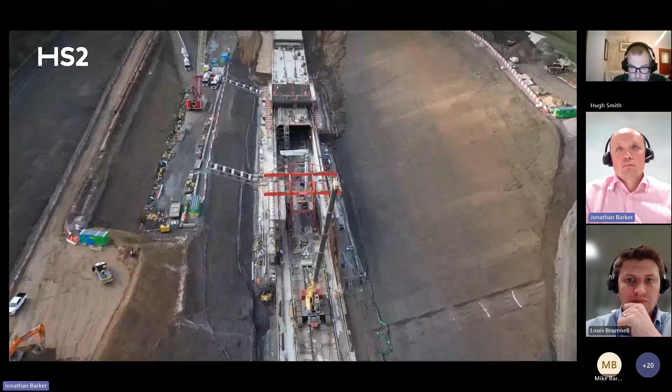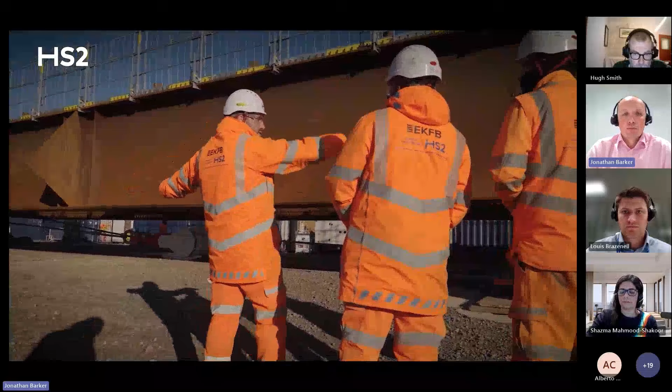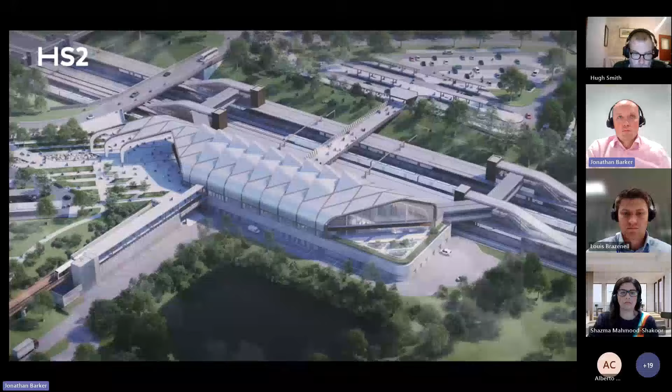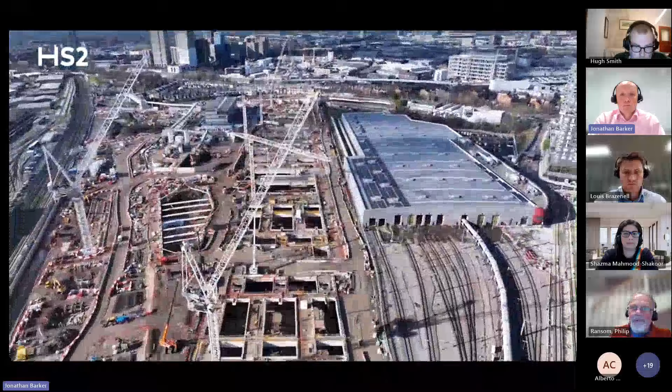Hi, my name's Hugh Smith, Stations Director at HS2, and I'm thrilled to bring you the latest update on the delivery of HS2, Britain's new high-speed railway. HS2 lays the foundations for a 21st and 22nd century railway network, providing more tracks, more trains, more seats, more connections, and faster journeys to improve performance and reliability across the wider railway network. The HS2 scheme will transform the way we move between our major cities, with zero carbon journeys between Birmingham and London, and services then continuing onwards to Manchester, the North West and Scotland on the existing railway network. HS2 is at peak construction right now, employing over 31,000 people day in and day out, bringing together the best of British design and British engineering. Investment in our railways means two things: better journeys and economic growth. Firms from every nation and region of Britain are already helping to build HS2 today, with over 3,000 businesses having already won contracts. The delivery of HS2 is opening up multi-billion-pound development projects in areas surrounding our new stations in both London and the West Midlands. The investment HS2 has attracted to the West Midlands is projected to add an additional £10 billion to the local economy over the next 10 years, creating 41,000 additional homes and 30,000 new jobs. Regeneration in West London, meanwhile, at Old Oak Common, is set to provide 25,000 new homes and 60,000 jobs. As the catalyst for urban regeneration, improved local transport connections, increased housing provision, and of course new jobs, HS2 benefits local people, local businesses and the wider economy. Thank you for joining us on this journey, and stay tuned for more updates as we continue to deliver HS2.

Just a quick recap there of where we are and what we're doing at the moment. A couple of bits the video doesn't pick up I thought worth sharing: it's 140 miles of track that we're going to be delivering as part of phase 1 of HS2. We've got 4 new stations being built at London Euston, Old Oak Common, Interchange in Birmingham, Curzon Street, 2 new depots, and 32 miles of tunnel along the route.

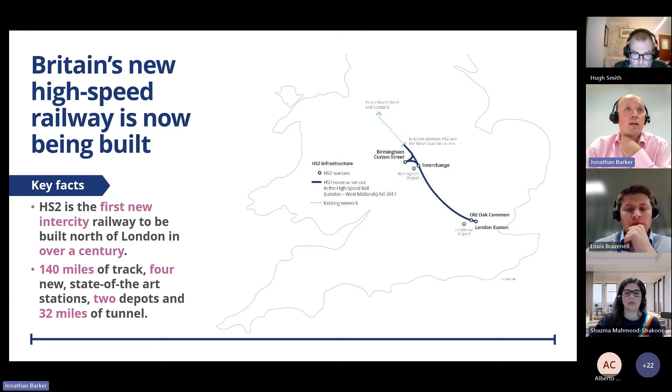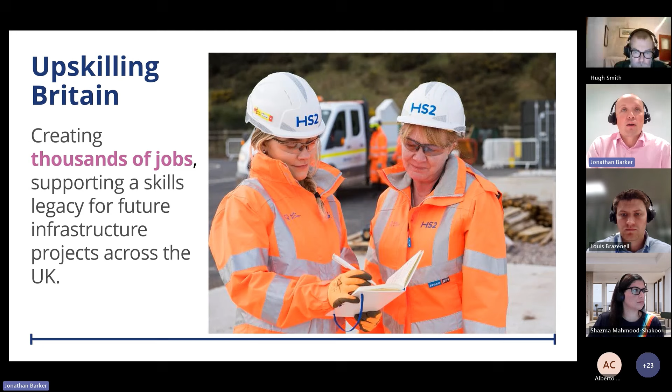Two particular things that video doesn't pick up that I think sometimes get missed by the media in terms of what we're doing at HS2. For me, that's upskilling the workforce in the UK. Hugh mentioned that we've got over 31,000 people now working on HS2 across the line of route. That is a massive workforce, and we don't necessarily have that full skill and capability in the UK, so we are upskilling people to take jobs within the industry. But for me, I think the big win is we've got over 1,500 apprentices now working on HS2, and for me they're the future of our industry of construction. The fact that we're giving them that opportunity to learn on a project such as this I think is great for them, and the fact that we're bringing those people on board I think is going to be great for the UK.

And then, whilst we're the biggest infrastructure project in the UK at the moment, we are actually the biggest green project as well. As part of what we're doing, we're creating 33 square kilometres more of new habitat across the route - that's a 30% increase. And so far we've planted 900,000 trees and already created around 120 new habitats along the route. We all know the railway corridor is a haven for wildlife, and we're trying to make the best of that as we can along the route.

But to delve into a bit more detail, Old Oak Common - I'm a project manager at Old Oak Common. I'm responsible for what we call the conventional station and the shared accommodation building. In layman's terms, I often say, as soon as you walk in the front door and you turn right, everything on the right is sort of what I'm responsible for, which will become clear as we go through the next slides. I've been there for 6+ years now, and enjoying my time at Old Oak Common working on this.

So what was there when I joined 6 years ago? It was still a Great Western Railway depot, housing a number of the diesel fleet that the Great Western Main Line Railway still ran at that time. There's also a Heathrow Express depot and sidings that were still there at the time. So that was 6 years ago when I started.

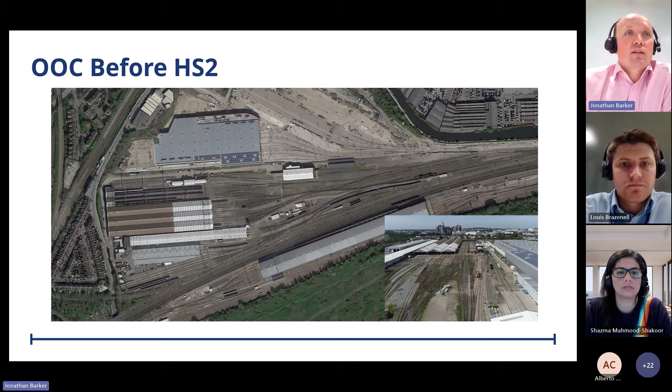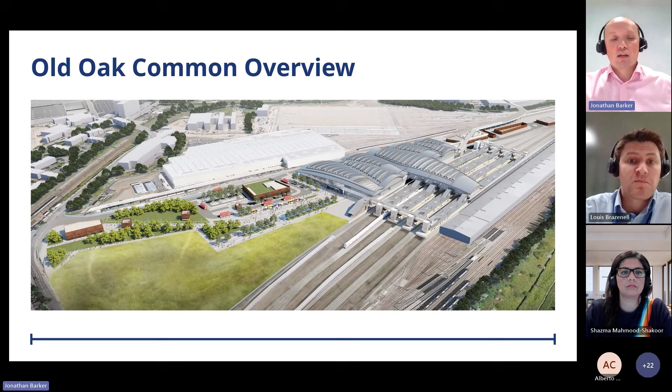And then when we finish this project in the future, what we will have is the biggest single station build in the UK, and the most and best connected railway station in the UK. But a bit more about the detail in this video.

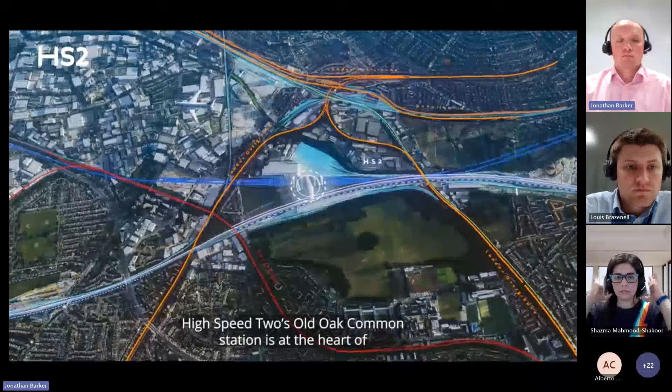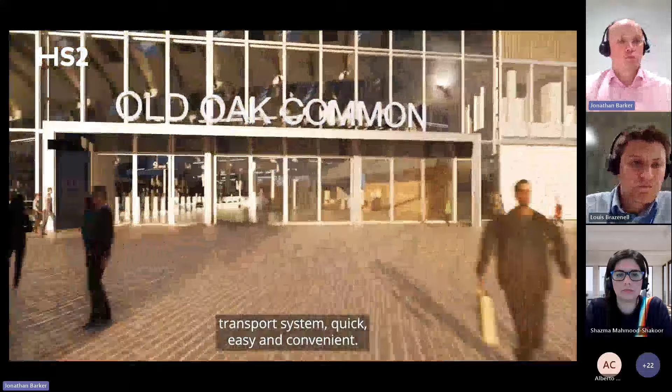In West London, a new super hub of connectivity is taking shape. High Speed 2's Old Oak Common Station is at the heart of the UK's largest regeneration project. This once industrial area is being transformed into a thriving, super connected neighbourhood, and an exciting development that will build a legacy for the local community to be enjoyed for generations to come. With its modern design, Old Oak Common offers seamless travel, making journeys in, out and around London's transport system quick, easy and convenient. A hive of activity, it will connect over 250,000 people every single day.

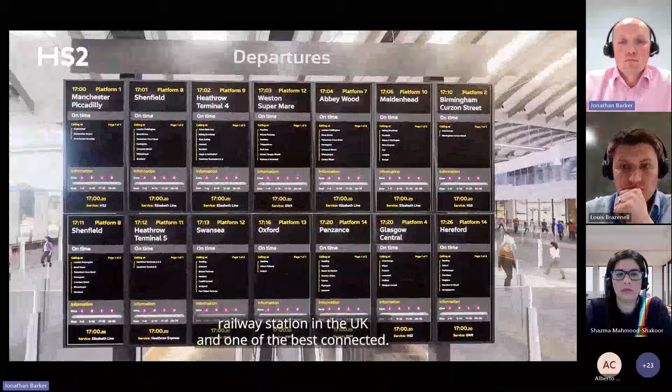14 platforms will make it the largest newly built railway station in the UK and one of the best connected. London's West End is around 10 minutes away, and Liverpool Street Station is just under 20 on the Elizabeth line. Heathrow Airport is only 10 minutes away on the Heathrow Express. And beyond London, it will serve as a gateway to Wales and the South West through the Great Western Main Line services.

At the heart of the station will be our high-speed trains, travelling at speeds up to 225 miles per hour. They'll transform journeys to and from the capital, with increased capacity, faster services and fewer delays. Old Oak Common Station will connect West London with the West Midlands and beyond.

So that's Old Oak Common in a bit of a nutshell. But if we dig a little bit deeper - and apologies, there was no pun intended in that.

We've got our 850 metre long box. If you take a slice through the station longitudinally, to put that in context, a London Underground train is circa 110 metres long. The new Elizabeth line trains are circa 200 metres long, and the trains we're going to be putting on High Speed 2 are 400 metres long. So we've got incredibly long trains that we're going to be running on the railway.

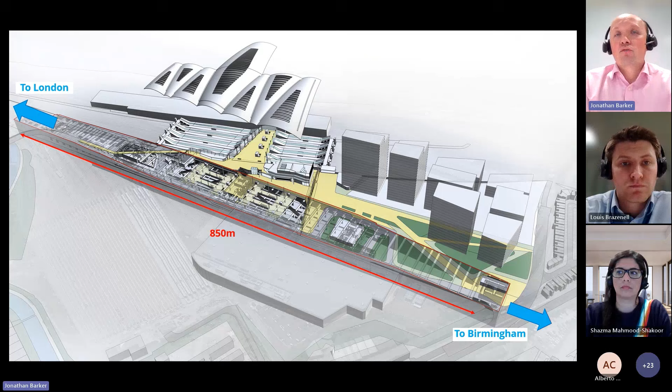So within our 850 metre long box, we've got the 400 metre platforms that sit in the middle of the box, and then at either end we've got points and crossings, etc., that allow the two-track railway running in and out of the box to get the trains to the 6 underground platforms we've got for the high-speed railway. The box is circa 15 metres deep and sits below Old Oak Common, taking the trains from the tunnels from Euston, and then running them up towards Ruislip, and up towards the viaducts we're building in that direction, and obviously up through to Birmingham after that.

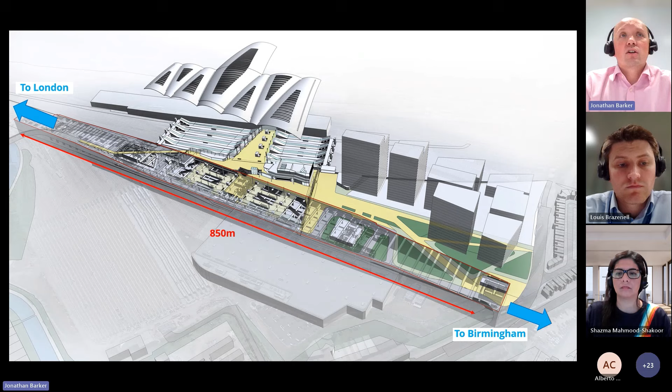If we take a slice through the station in the other direction, this gives a better idea of what the station would be. On the left, we've got the High Speed 2 station with the 6 platforms below ground, and that part of the station, as well as the shared accommodation building which sits in the middle, will be operated and maintained by High Speed 2. The shared accommodation building works for both HS2 and NR. All our back of house facilities are there - switch rooms, pump rooms, welfare, the station's operations room, etc., will all be in that shared accommodation building section.

And then on the right, although HS2 are building it and paying for it, NR will maintain and be responsible for the conventional part of the station, which has 8 platforms being built on that side. And then over the top, we've got a big arch structure - that's one of the key features of the station. A lot of us have travelled around the UK and particularly around London, and you've got a lot of often different operators going into a station, and sometimes they're not always the clearest for the customer of where they should be going.

What our aim at Old Oak Common is that the customer experience will be seamless, no matter which part of the networks you're going on, whether that be High Speed 2, Great Western Main Line, Heathrow Express, or the Elizabeth line - your customer experience will be exactly the same. So everything should operate seamlessly with the signage, the lighting, the direction, and the operation will have a single operational room at Old Oak Common that will run the whole station.

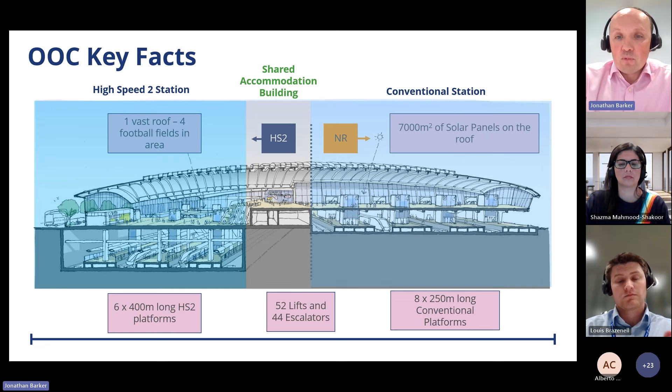But given the size of it, we have managed to achieve the BREEAM outstanding level at RIBA 4, which is the end of detailed design, and that's been driven by adopting innovations and low carbon options in its build, and also targeting net zero carbon for our operations phase.

If you take a walk inside the station, you'll see the openness of the station. We're trying to create a good atmosphere, a good offering to the customer. We're creating a net zero travel option here, and we want to attract the customers to it. We don't want their experience to be something they don't want to do. There's no point putting this provision in place if we can't get the customers to come, so we want to create an offering that's attractive to the customer.

Within this large space we have now, this large atrium layout allows for natural ventilation, and with use of sensors and the natural light coming through, we're able to reduce the carbon impact of the station running in day-to-day use. We've also got a combination of solar panels on the roof and air source heat pumps that again provide that additional push towards creating a net zero station.

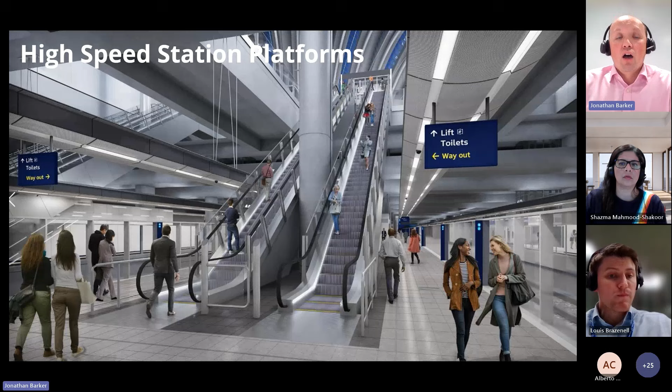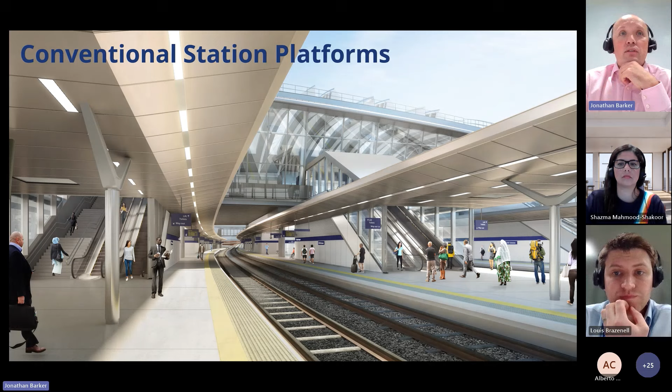If you look from a different angle, if some of you think of Clapham, I'm sure many of you have seen Clapham Junction Station and the amount of platforms we have there and how congested those overbridges can be, we are the opposite here at Old Oak Common. We're trying to make it spacious, allowing for the capacity of passengers we're going to have, not only on day one opening, but also in 100 years' time. So we've created a spacious overbridge that allows that free flow of passengers, and again creates a comfortable journey through for the passengers.

When I first started at Old Oak Common, I wasn't on the station, I was on the bridges, and I used to get disheartened quite a bit because we'd see all these great pictures of Old Oak Common Station, and I could show my friends this is what I'm working on, and which bit are you on? Oh, I'm on the bridges just outside the bit of the photo you can't see, but they are really important, honest. Well, in reality, they are really important.

If you come out of the station and turn left, there's a road that goes down to the bridges, which takes the Great Western Main Line. Currently, like a lot of bridges around, it's pigeon infested, not a great place to walk through, and it can only take single decker buses.

We are creating at Old Oak Common one of the biggest interchanges in the UK, so we need more than single decker buses. One of the things we're having to do is lower the road under the bridges. Also, because we're going from a 4-track railway to 8 platforms, that needs slightly more width to the railway tray, so we're having to widen these bridges along Common Lane to allow for that additional track space. Those are the works happening on the bridges.

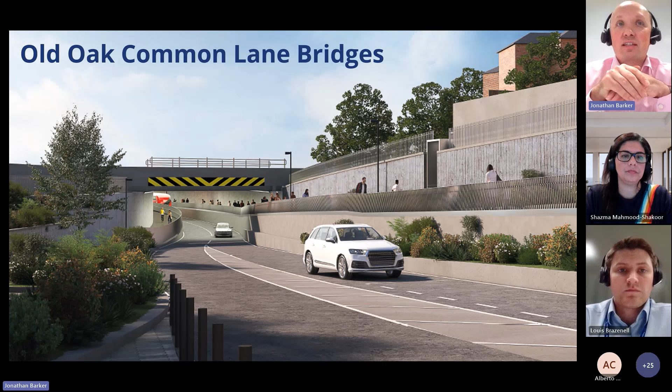As luck would have it, this road seems to be the West London super highway corridor for pretty much every utility that exists in London, so it's not an easy job to move the utilities out of the road to allow the lowering. Whilst it might not be in all the pretty pictures around Old Oak Common, the critical path for Old Oak Common goes through our utilities diversions in this road, and it's actually one of the top critical, or subcritical, paths for HS2 opening. So whilst it's not glamorous, it's probably one of the most important parts of the HS2 project at the moment.

From the other side, when I talk about the pigeons, we're trying to create an environment that invites the customer into the station as part of this bridge renewal. So much so that if you want a nice romantic walk, according to the architects, we've got a couple there having a romantic walk on a summer's day. That's the sort of change we're looking at, tongue in cheek, but it's creating a nice environment for the customer again, and more importantly, a safe environment for customers to travel through the area.

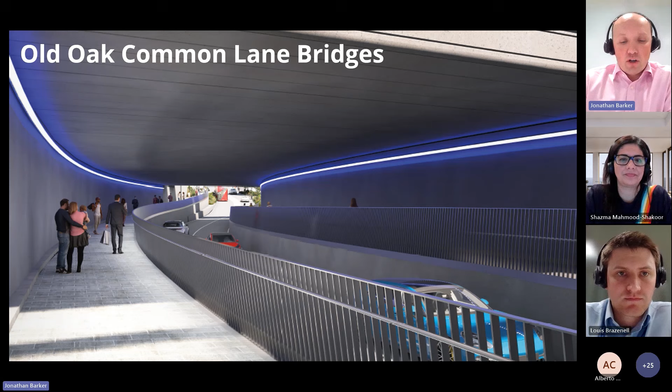So that's a little bit about the design of the station and some of the key features. The only thing I haven't mentioned is the public realm outside, which, as covered in the video, is 3 times the size of Trafalgar Square. It's a good offering for the local community, as well as the travelling public. As you probably know from the press, we will be the temporary terminus for HS2 phase 1 until we get Euston on board.

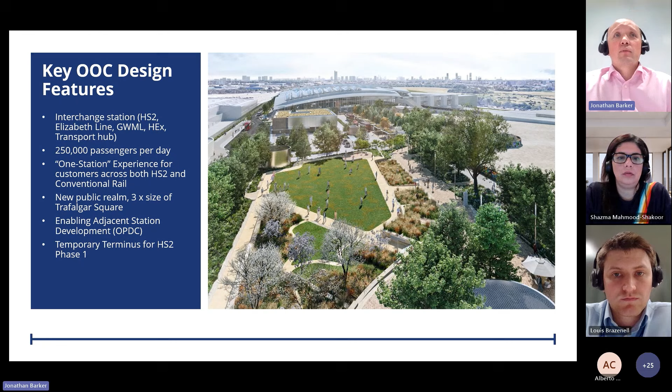So now you know what we're building, how are we building it? This video will show you, hopefully.

At Old Oak Common in West London, construction has started on what will be the biggest newly built railway station in the UK. The construction will be a feat of engineering carried out in 3 main phases. In the first phase, the underground part of the station will be built, what we call the box. This is where 6 high-speed platforms will be located, serving the Midlands and the North.

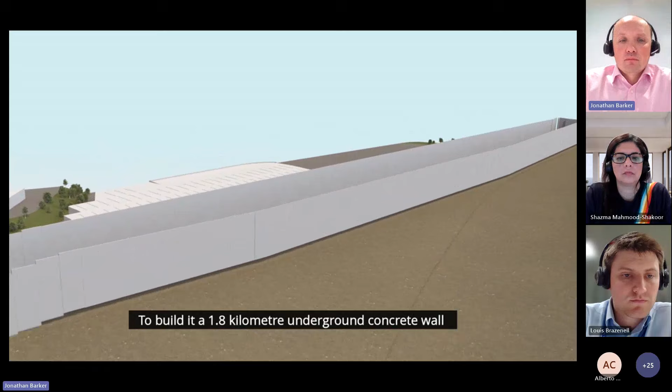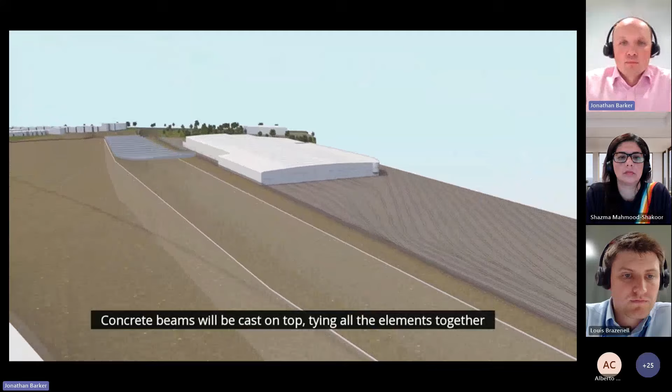To build it, a 1.8-kilometre underground concrete wall will be installed around the perimeter of the underground box, and 160 steel reinforced concrete columns will be installed to help form the box and support the structure. Concrete beams will be cast on top, tying all the elements together to form a large concrete structure. This will then allow the earth inside to be removed safely. The amount of earth taken out of the box will be enough to fill nearly 300 Olympic-sized swimming pools.

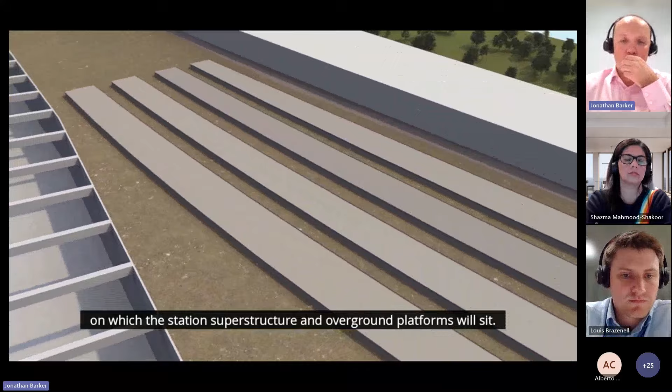In the second phase, as excavation of the underground box is taking place, work on the 8 overground platforms will begin. Over 1,600 concrete piles will be installed into the ground, on which the station's superstructure and overground platforms will sit. These platforms will then allow Elizabeth Line and Great Western Main Line services to stop at the station.

As the high-speed platforms and the overground platforms are being completed, the High-Speed 2 station and surrounding urban area is built, the third and final stage.

The main element of the station will be its immense roof. Covering the area of over 3 football pitches, the lightweight roof structure has been designed to minimise the use of materials and allow as much natural light in, which reduces the carbon impact of the station.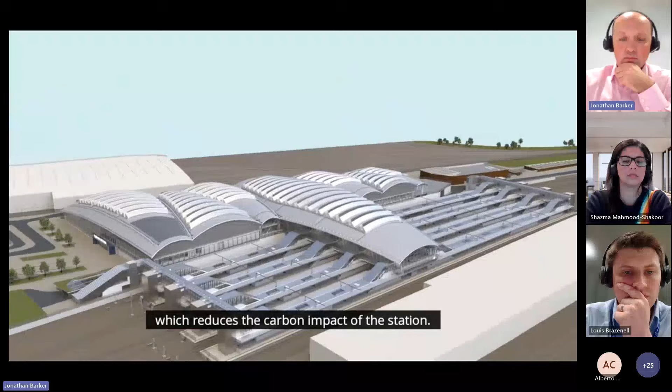To further boost its environmental credentials, the roof will be covered with solar panels, generating a supply of renewable energy for the station. This curved design of the roof brings together the 3 different rail lines under one unified building, creating a common experience for the passengers, turning it into one super hub station.

With over 250,000 passengers using the station every day, Old Oak Common will be the best connected and largest new build station in the UK, making it one of the country's most vital transport hubs and a catalyst for economic regeneration for the area and the rest of the UK.

Yeah, if only it was that simple as that video shows, but hopefully that gives a flavour of how we're building it. In terms of our 5 key challenges, as you can see from this picture, Old Oak Common Station is bounded on two sides by railway, and the third side is Old Oak Common Lane.

So all our material has to come in and out that one single entrance, and we're limited under the Act by how many lorries we can bring in and out every day. So logistics is a big part of our challenge.

I've already mentioned number 2, around the utilities. Number 3, we have 2 TBMs being launched from the box, and we receive 3 tunnels into the box. So again, our interface with our HS2 neighbours is a big part of what we're doing, allowing them to do their work without distracting from what we're doing on our site.

Number 4, Shazma will talk about later - we've got high-speed rail systems coming on board. Once they start, that's a new interface for us to deal with and actually work with to create the railway.

And 5, probably the one you'll be most interested in again today - if you look at the drawing here, you can see a red line going diagonally across. That's the boundary of our site currently, and we're building everything to the left of that. To the right, in the orange shaded area, is currently where the Great Western Main Line sits into Paddington.

We have one large Christmas possession, during which we will take the track from that orange area and feed it through the platforms, at which point we get the orange area as open land. That allows us to build platforms 1 and 2. We have another large Christmas possession, at which point we go to the full 8-track railway through the station.

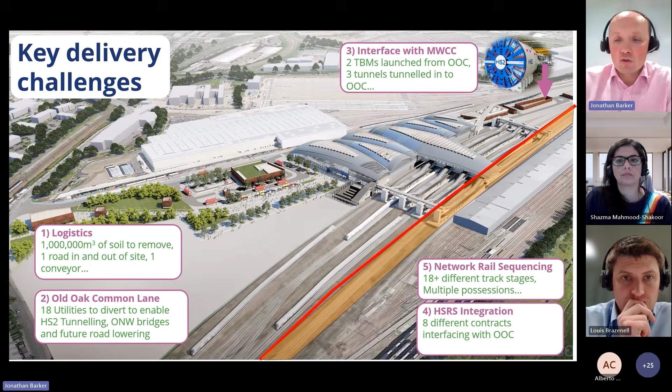We've got a fly-through of what this looks like after the first possession. This is travelling inwards, coming towards London. You can see the bits in blue, the bits we're modifying, and then as we come to what is the North London line bridge, we have the new railway that's been built.

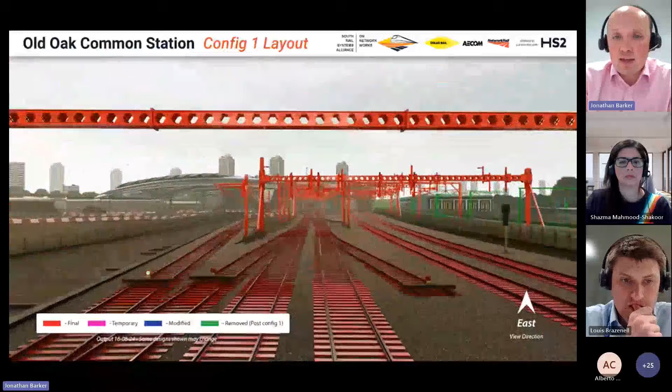We'll be working in possessions in some part, with Christmas possessions to do the bits that divert out, and this section going in was all built on a brownfield site prior to that Christmas possession. In that first Christmas possession, we leave the stuff in green on the right, which was the existing railway, and we'll take that out post-possession, because that becomes a brownfield site that's non-railway.

And then we have the railway coming through the newly built station. We still have parts of the station to continue building, but we will have a live railway running through the site at this point.

And then slowly the tracks come back and take up the alignment of the existing railway by the time we hit the bridge structure that's coming up. We're restricted by that existing structure, and then we'll be back onto the original alignment into Paddington.

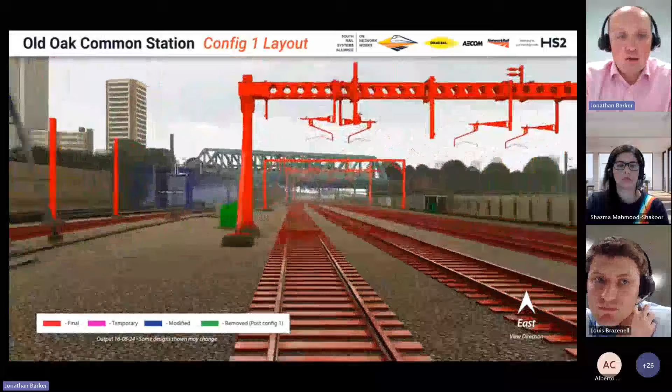We can see from all the red that is there, that's a lot of infrastructure that we're going to have to install before that first Christmas possession, before we even start thinking about the second possession and what we do in that. And then just some quick wins we've had recently.

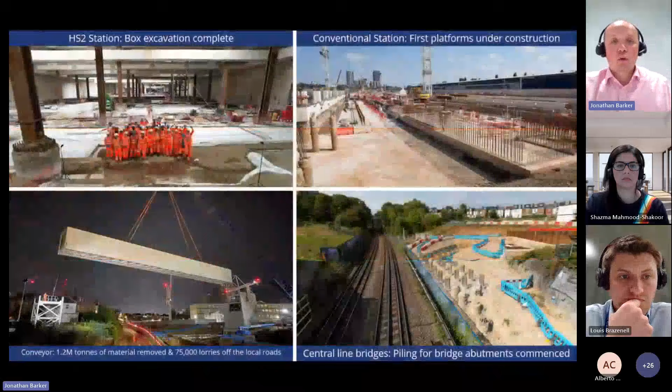We've completed the excavation of all the box in the summer, so that was a massive milestone for Old Oak Common. We've started building the conventional platforms - they're the first platforms being built on HS2 anywhere, so that was again a good milestone for us.

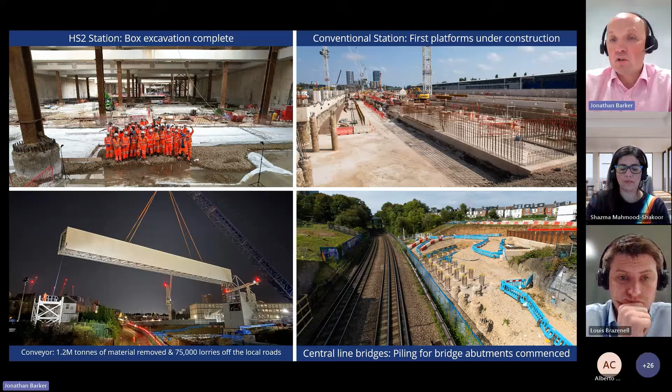We had a conveyor system that took out the muck from the box. You can see in the bottom left, that's the part of the conveyor that went over Old Oak Common Lane being removed, and piling has started for the bridge abutments that we're going to be undertaking.

Some good strides forward, which I'm proud of the stuff we're doing at Old Oak Common. And then next 6 to 12 months, more of the same. We'll be doing the construction of back of house and platforms, and stuff starting in the box now.

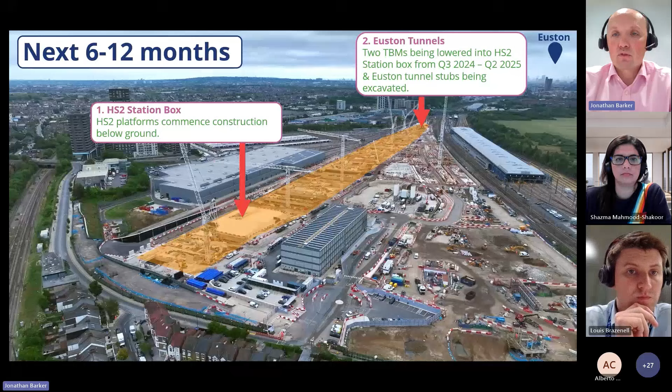Euston Tunnels - now we've had the budget last week - that will be starting in 2025, I believe, off the top of my head. And then conventional stations, as I said, will continue doing those platforms, and utilities works ongoing.

And that is a bit of a whistle-stop tour through Old Oak Common, and I'll hand over to Louis, who will talk us through about interchange and the APM.

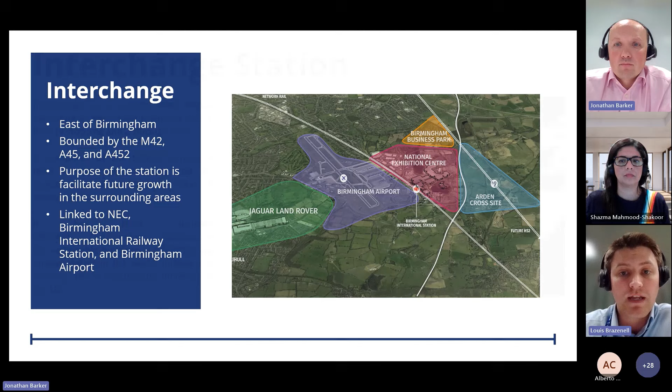Next slide, please. So interchange station, it isn't as complex as the other stations. We're on a greenfield site, but where our complexity lies is the time constraints, because we haven't started construction yet.

All the other stations have started, and we are the only greenfield station. So whereas Old Oak Common is being badged as the largest regeneration project, we are the largest development project, because we've got so much greenfield space that developers are chomping at the bit to try and get hold of and acquire and build around us. So interchange station itself, it's a surface level station.

It has 2 island platforms, so four platforms that will serve customers, with 6 lines, 4 stopping and 2 through lines, because some of the trains originally would have carried on straight up to phase 2, and some will miss out interchange and go straight into Curzon Street.

It comprises of 2 layers. So you have the station concourse layer on the top level, which is public facing, and underneath we have the podium level, which houses all of our back of house rooms.

At our RIBA 3 design, unlike Old Oak Common, which is at RIBA 4, we achieved our BREEAM outstanding certification for sustainable buildings, and we did beat Old Oak Common, so we were the first railway station to get the outstanding, because I think they achieved it in the detailed design and we got it in the scheme design. So we just have to maintain that when we move on to our detailed design.

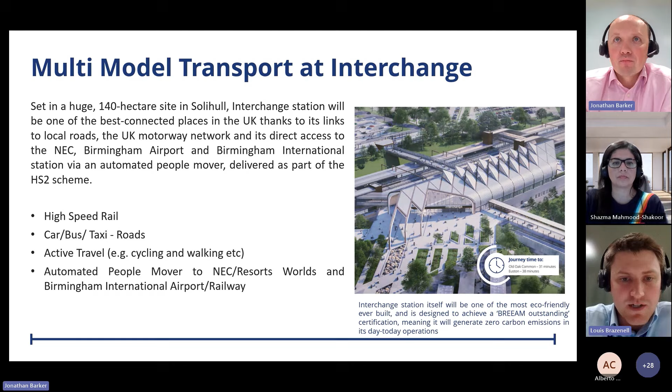So this is a bit of an overview. We're situated on a 140 hectare site. We initially had 7,500 car parking spaces. These have been reduced to 4,500. Our current work is in that reduction from 7,500 to 4,500.

We had a couple of schemes. We had both the surface level car park scheme, which is what we've opted for and what you can see now, and we also did look at a multi-story car park scheme. The reason we went with the surface level in the end, we do have some complexities with our site. There are 2 landfills on the site, and the multi-story was in car park A, which is on the screen now. The reason we opted to move away from a multi-story car park is the amount of remediation and the depth of the piles that would be needed to support this multi-story car park on car park A because of the existing landfill and quarry that's also there.

The costs were too high. So we've opted for a surface level car park scheme, but have worked with local future developers to ensure that we are giving as much back to local businesses and landowners for future development.

I won't go through the whole slide, but you can see there's features with elements of greenery, SuDS, making sure we have accessible parking, drop and goes, coach and bus parks as well, and you can see a few bike images on there as well, which are the current stop and starts for existing active travel cycle routes through this area, and so that would be connected through this scheme.

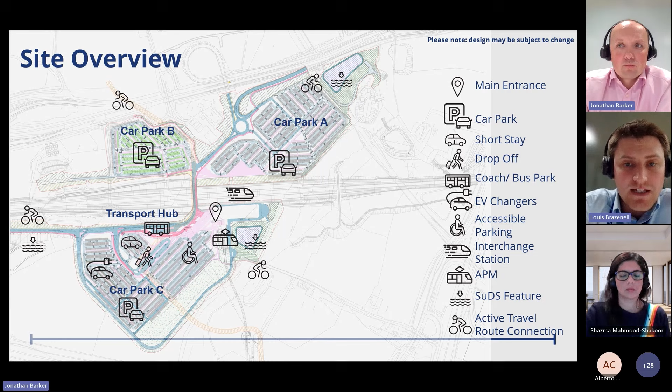So where are we at the moment? So Arup, who is our SDSC - I can't remember what it stands for now, it's a station design services contractor, SDSC - was selected in 2018 to do our scheme design. So that's been gone and that's been completed.

And our contractual model is we have opted for a 2-stage approach, which is stage 1 is an NEC3 engineering and construction contract, option A, so fixed cost, and that's with our contractor Laing O'Rourke. The aim of this is to refine the design. So Laing O'Rourke refined the design from the 7,500 to the 4,500, and to ultimately provide us a target price and programme, which will then be used to deliver stage 2, which stage 2 is your typical design and build, which will be delivered under a target price contract with an activity schedule.

So Laing O'Rourke were awarded the stage 1 contract in June or July 2022, and AECOM is their subconsultant who have been providing their design. As of - it says September 24, but I can confirm as of November 24 - we're still in stage 1 and we are finalising those final price and programme with Laing O'Rourke, with the aim to get into our stage 2 contract by the end of 2025.

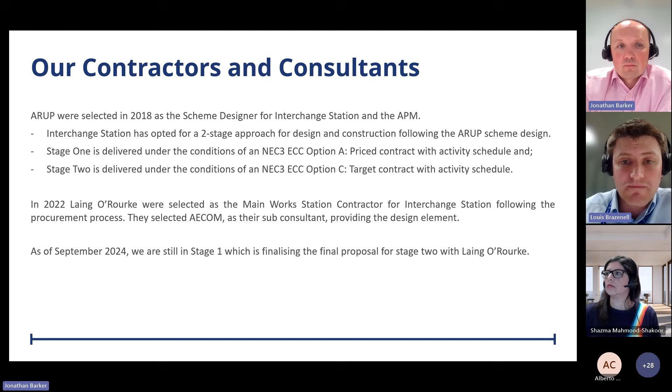So the key challenges for us - I said it at the beginning, we're arguably the simplest station out of the four construction wise, and that's emphasized by the fact that we're trying to focus on prefab a lot, building off site and importing it to site, fixing it together like a big Lego set. So our key challenges really are, whilst we don't have the physical constraints that say Old Oak Common, Curzon and Euston do, we have heavy political and stakeholder interest because developers are keen to get hold of this land.

So there's a lot of interest and pressure to get this done, and we're not in construction yet. Due to being the last station awarded, we've got a high focus on lessons learned and efficiencies. I've just completed a 6-month secondment down at Old Oak Common, which was intended to develop me personally, but also to pinch good ideas and bring them back up to Interchange to try and implement them. So we've got a lot of focus on that.

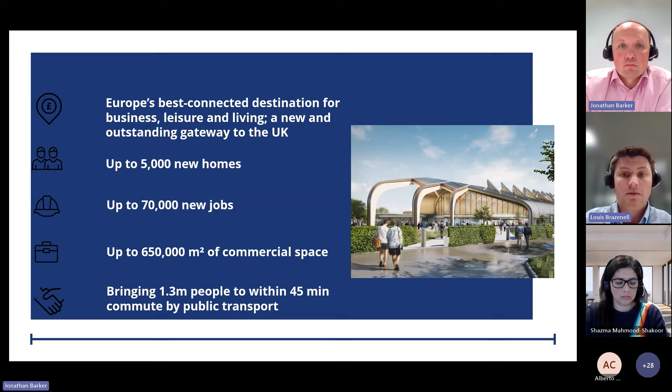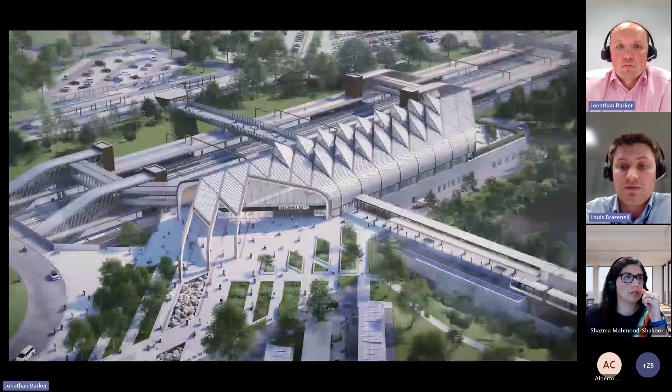I've got a couple of slides now on the visuals. This is Interchange station - the roof. We're focusing on natural light and ventilation, and the architecture is meant to represent petals, trying to let in natural light. We have solar panels which have helped us maintain our BREEAM outstanding rating. You can see in the bottom right the APM station, the automated people mover station, and elements of the car parking, with a real focus - hopefully you can pick out the greenery we're trying to maintain throughout the scheme.

Next we've got the front of the station, and what is for us our iconic three prominent fingers of the station, creating that sense of grandeur.

We've got a couple of images from the inside, with more of these earthy, natural tones. We've opted for a glulam structure on the interior, which has presented its own challenges to ensure it's compliant with fire regulations, so a lot of work has gone into our fire safety for Interchange station.

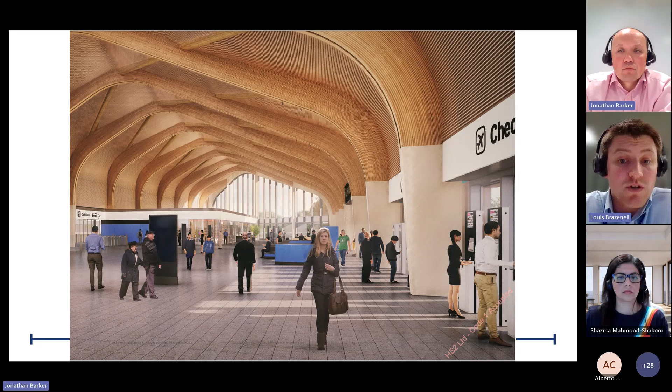So that was interchange station.

Now I'm going to quickly talk about the APM as well. The APM is a mass transit system that plans to connect interchange station to the NEC, to Birmingham International Railway Station, and then into Birmingham Airport itself. We have to cross a number of assets, which I'll cover in a second. It's meant to have 5 trains with 3 cars each, 4 on the network serving at one time, with 1 in the maintenance facilities. We are transporting 2,100 people per hour per direction.

So I've had to put some fun facts together. We've got about 20 hours of operation, which leaves our maximum capacity at transporting 84,000 people a day, which nearly fills Wembley. So we are transporting at maximum capacity Wembley amounts of people per day on the APM.

Some more stats on the screen. The maximum journey time duration is 6 minutes between Birmingham International and Interchange, and there'll be a 3-minute headway between vehicles. In essence, one of the business cases for this is you could land a plane in Birmingham International Airport, and ignoring luggage and picking up your luggage, you can be in central London within an hour.

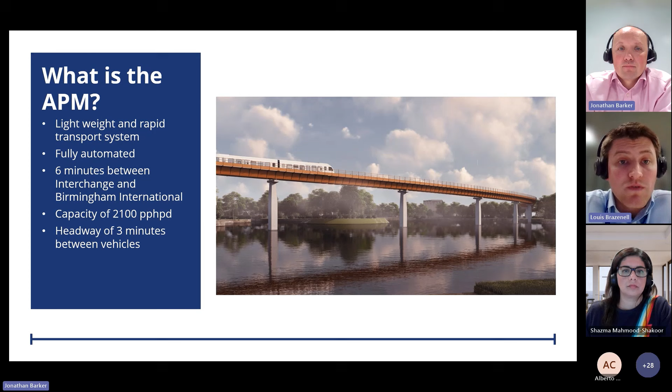Across active car parks, so all of these businesses will remain operational while we're constructing it. So we have to manage between airports' busy times. At a high level, we're not allowed to work near the airport near Christmas and Easter. Near the NEC, we're not allowed to work over summer because that's their busiest time.

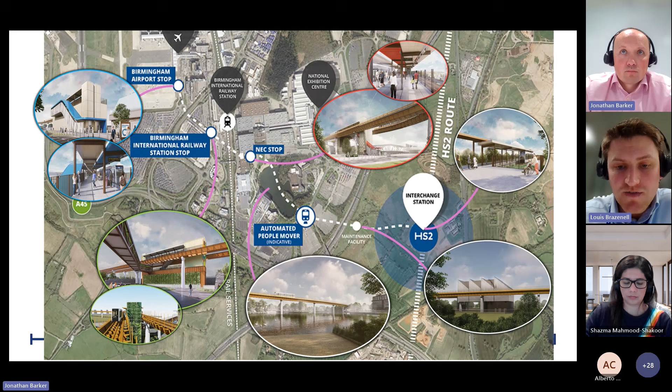The benefits. So again, I've repeated some of it. I won't repeat all of them, but it's to provide that connection that when you land in Birmingham Airport, you're just as well connected, really, to London as Heathrow, Gatwick, Luton, Stansted. If not compared to some of the latter ones I've mentioned, potentially even better. From Curzon Street to Euston, it's a 49 minute train journey from Birmingham to central London. So obviously it's shorter from interchange. So it puts that Solihull area essentially in the commuter belt for London.

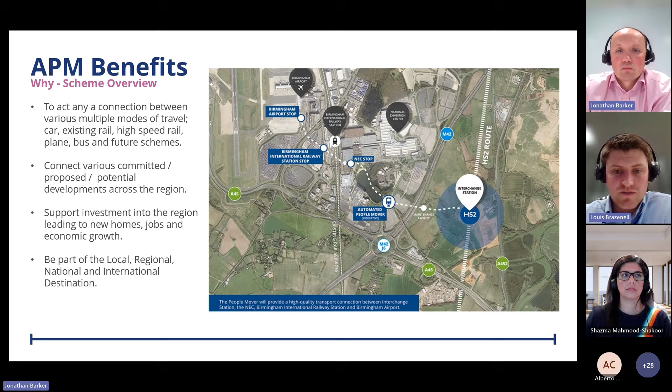If you jump to the next, please, Jonathan. Again, stakeholders are our challenge. So Birmingham Airport, it says there that it's looking to expand to 18 million passengers a year and increase their workforce beyond 6,700. Currently, last year, 2023, Birmingham Airport provided services to 11.5 million passengers. So you can see there our APM is part of their business case to expand up to 18 million.

The NEC is looking to redevelop lands and create new homes. And SMBC, Solihull Metropolitan Borough Council, are looking to create a whole new borough, which was the master plan that I showed you before.

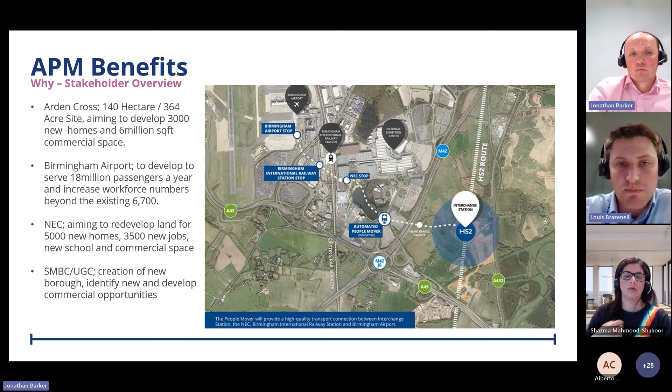Next, please John. You know what, actually skip past it. So I've kind of talked about that route as well.

Thank you. So again, I'm just reiterating the point. For us, it's our stakeholders which are complex. I've mentioned that we cross the motorway, the West Coast Main Line. We connect into the airport, and we have to be cognizant of the airport's operations. We have the NEC, which have events on, that we have to manage. And we also have a lot of utilities which we have to divert ahead of our infrastructure contract.

And final slide please for me, John. The one thing I haven't mentioned, which is our key challenge as well as stakeholders, is the rest of HS2 is pretty much built in the trace. Our enabling works contractors have come on board along with our main works civils contractors and sterilised an area of land in which we're going to be working across, and that isn't the case for the APM, and is one of the only locations in HS2 where our structures significantly deviate away from the trace. We've had to do a lot of work to get third-party agreements, land agreements, to ensure that when our infrastructure contract is launched in a few years' time, whilst the infrastructure contract isn't too complex - it's piers and viaducts and piles - it's getting across these live businesses and national infrastructure, the railway and the M42, that we have to work around. So there's a lot of upfront work for what should hopefully be a smoothish, fingers crossed, delivery.

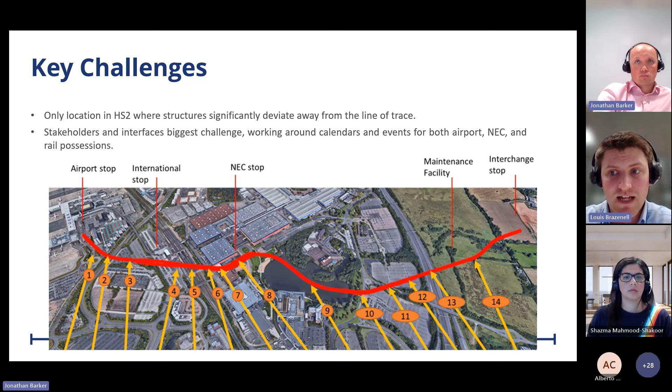So on that, that's the interchange and APM. Oh sorry, I've got these slides as well. So just some visuals as well, I'll whiz through these.

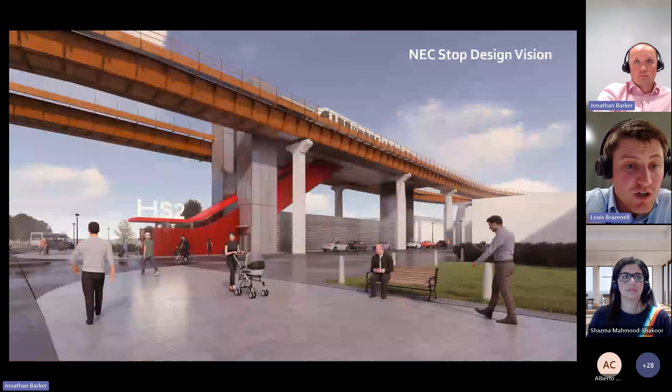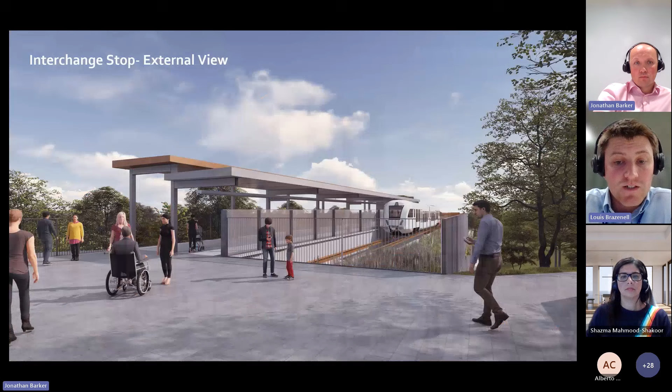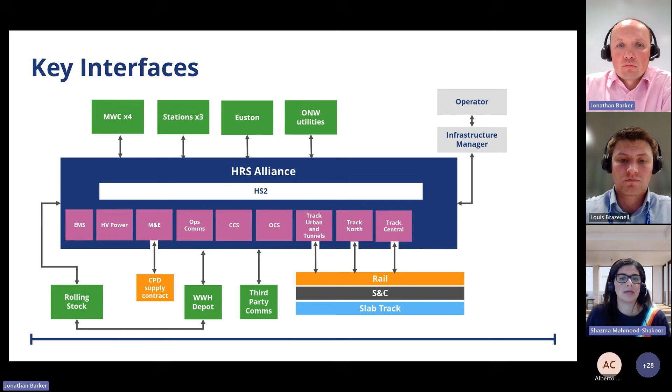So an overview of the track contracts. We have our Tier 1 design and build contractors who will be coming in on NEC3 option C target cost with an activity schedule. We've split the route geographically into track urban, track open route central, and track open route north for phase 1.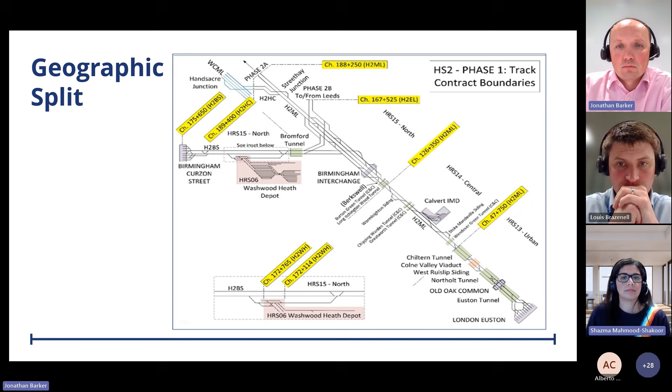This is just a very quick, brief summary of the track contractor scope. I'm not going to read it all, but the key things are they're designing, procuring, installing, testing and commissioning all of the items listed: the track system, S&C, rail expansion devices, buffer stop, surface drainage, and the infrastructure maintenance depot I just spoke about.

There are additional duties as well that the track contractors will hold. One is that they'll be the principal contractor for the site and working areas, including railhead coordination. They'll also be the lead contractor for traffic and transport, community engagement, environmental sustainability, consent management, and survey. One final duty is responsibility for the works trains and offices for other railway systems contractors.

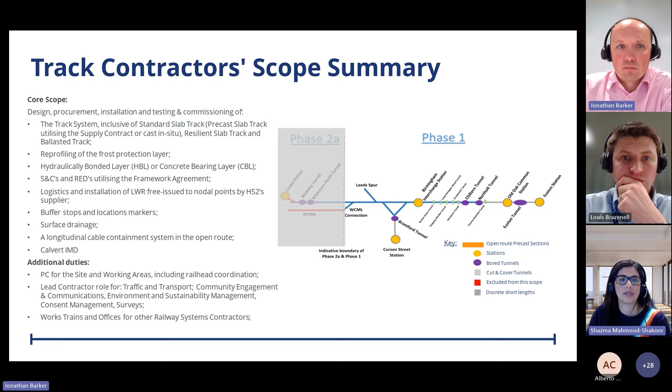This is just a schematic to give you an idea of the guiding principles we're using for construction. The idea is that we build from railheads and rail connections - Louis mentioned earlier the importance of having a station in place so we can have the rail connections to deliver materials and build from the railheads. The idea is to go in both directions so we have a flow of resources and can store materials on the route.

In addition, sections of the trace will be handed from main works civils to rail systems - I think it's 25 to 30 metre sections - to allow construction to happen in bigger phases. We'll be building heavy systems first and then come on with light systems. So it won't be the traditional approach where everybody floods the site from all disciplines and builds; it'll be more of a controlled sequence of works.

Going back to that slide I was talking about earlier, moving on to the Tier 2 supply contracts. I've already mentioned these briefly, but we have a supply contract for precast slab track, one for switches and crossings and rail expansion devices, and one for supply of long welded rail.

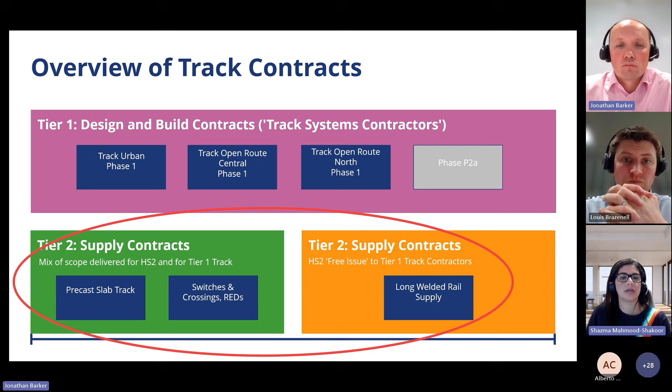This is some of the slab track componentry that we have. The idea of the contract is that it's a design and supply of precast slab track system. PORR is the company that has been awarded this contract. They're working under a HS2 framework contract, which includes systems design, and they're also supporting us via installation and maintenance manuals, and providing information on how the system will work. Later on, they'll work with the design and build track contractors on a call-off supply contract basis.

So they'll be assisting them with detailed design, manufacture of the system, and training in the installation.

This is a standard slab section, and this will only be used in our open route sections where we have structures and earthworks. It'll exclude areas where we have switches and crossings, rail expansion devices, and bored tunnels. Due to the complexity of these, they're subject to agreement with the incoming track contractor on how those will be built, and it's more than likely that we'll have a cast in situ arrangement for those.

Can you move on to the next slide, please?

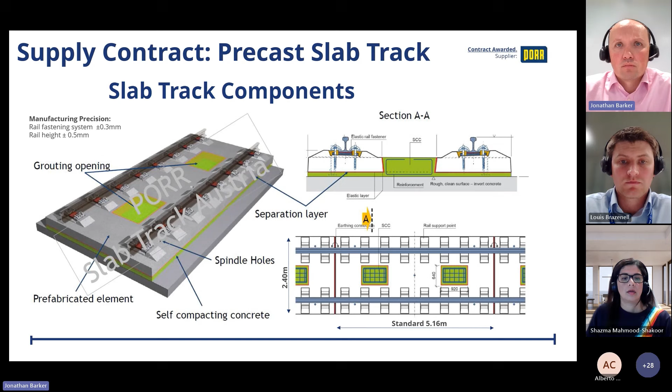This is the second supply contract, which is for switches and crossings and rail expansion devices. We're going to have swing nose crossings for the high speed S&C. There's an illustration in the middle to show you the components of that. It'll be a design and supply of S&C and rail expansion devices for structures, and this is going to be only the ironwork. As I mentioned earlier, the track contractors will be installing what goes underneath the ironwork, the slab underneath.

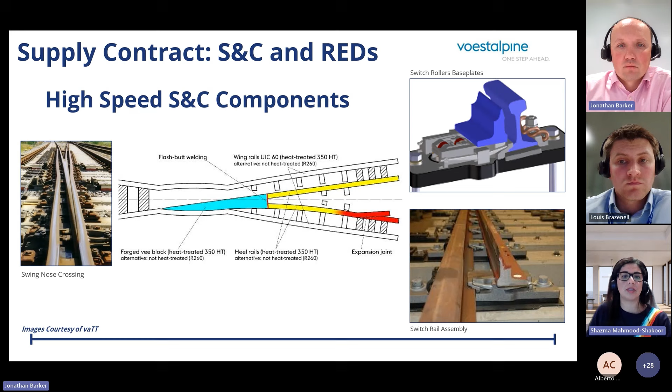So for the main line, we're going to have the Ecostar point machine. We'll have multiple point operating equipment Ecostar motors at the switch and crossing panel, and there'll be multiple end position detectors as well associated with point motors. We'll have the HRS locking device at the switches and crossings as well. This has been adapted for high dynamic forces, and it secures the locking switch in horizontal and vertical directions, and we'll have a holding down device at the swing nose crossing.

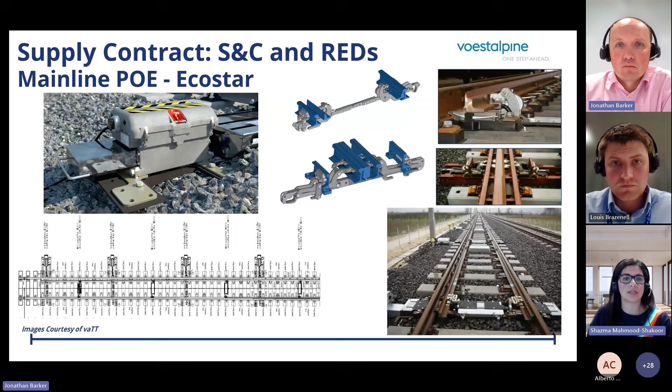Can move on to the next slide, please. We have a slightly different situation for depots, where we're using rigid single crossing, which will be a semi-welded design, and we'll have non-elastic base plates. And the point operating machine that we'll have there is the Unistar, which will serve to provide the drive, lock and detection for the turnouts.

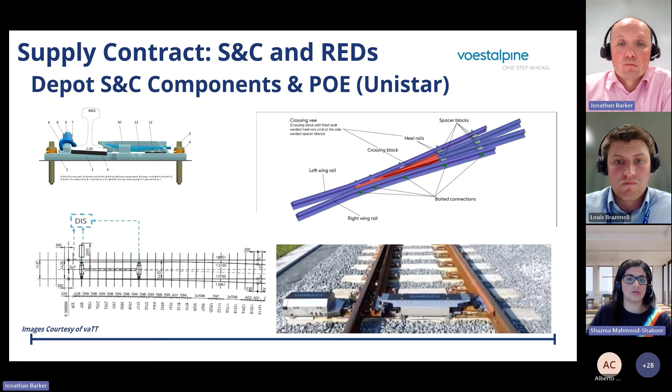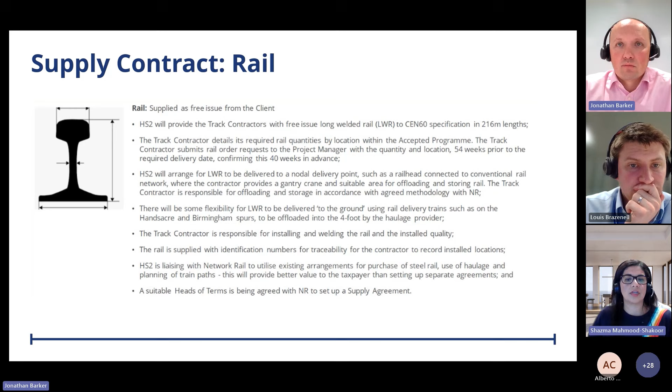And just to add that the rails will be procured and delivered to the nodal points, as I said earlier, in terms of the railheads, for installation by track contractors.

I just thought I'd also talk about our 2 depots, just to provide you a little bit of information on those. So we have Calvert Infrastructure Maintenance Depot, which I mentioned a little bit earlier on. Calvert is situated approximately halfway along the route, around 80 kilometres from Euston and 96 kilometres from Curzon Street. It's located on land adjacent to the HS2 route, northeast of the East West Rail Bicester to Bletchley line. The primary purpose of this depot is to store, configure and manage our on-track machines or on-track maintenance machines.

This depot is going to start life as a railhead, and it'll be the main feed for getting materials onto the trace to enable the rail systems contractors to construct the railway. We'll have storage points for materials for construction of the rail systems along the trace, and there's going to be a mixture of temporary and permanent buildings in this depot. It will also include OTM workshops, storage facilities, and a training compound.

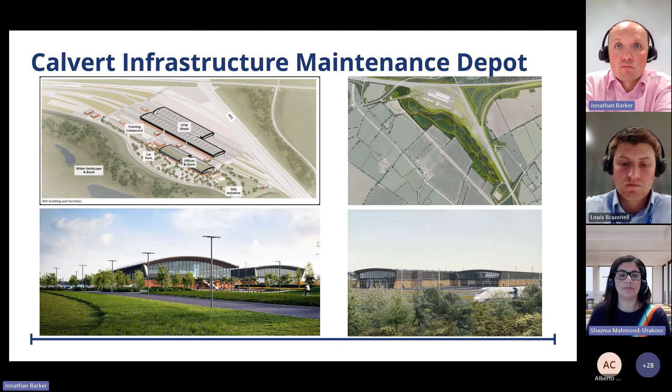Making the decision to go for slab track on HS2 was a key enabler to help us reduce the Calvert depot footprint by 30%, as we didn't need increased material storage for renewal campaigns, and also it would remove the storage capacity for the added plant and equipment that would be needed to maintain a ballasted railway.

It will operate 24 hours a day, 7 days a week, and it will provide a huge regeneration opportunity for East Birmingham. The NICC, Network Integration Control Centre, is a standalone facility, but it will be based on the Washwood Heath Depot site.

It will have responsibility for coordinating and controlling the delivery of the train service across all aspects of the network, and it'll be heavily secured in our operational infrastructure. The building's been designed to prevent and minimise the impact of terrorist attack, fire, flooding and freak weather events so that we can keep the network running.

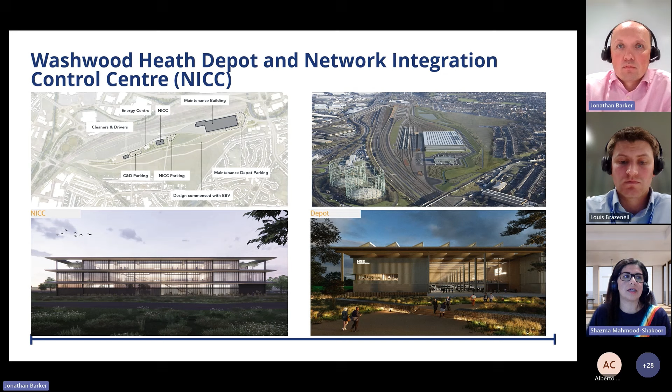One of our key challenges is because we're coming in different phases, making sure that everybody comes along and builds their bit in the right place to connect with the bit that's just been built. So survey grid for us and a survey control network is really important. We are all working in a HS2 snake grid, which has been created specifically to allow everybody to be able to work in that grid. It's the seamless, continuous, distortion-free coordinated space without zones or overlaps.

As I just mentioned, we have a survey control network as well, which is a hierarchical network, and we have stable monuments out on the ground. It's to allow us to be able to build precisely and accurately, as I've just mentioned, to be able to connect everything together. So all contractors are given the survey control network and expected to work within it.

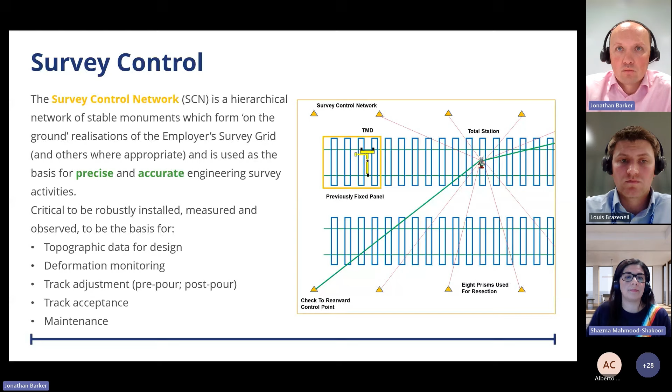And finally, where do I come into this? I'm a lead project engineer. There are several lead project engineers across rail systems for all different disciplines. I'm track and I report to the head of engineering for track. I work alongside the NEC project manager and provide technical support and guidance to help administer the contract.

I'm also involved in leading the acceptance of all the documentation that comes over from the contractors in terms of design submissions and all their engineering management plans, design management plans, and that kind of thing. I will act as the NEC supervisor once we're out on site to ensure that they're building the works to the required quality.

Technical assurance is another one of my key roles, where I'm involved in coordinating the flow of this from contract level up to systems level and all the way up the business so that we can get authorization of the railway. We have subject matter experts throughout all of our disciplines, and we as LPEs act as the facing person to the contractor, then dealing with the SME to get clarification on departures to standards, audits, design queries and that kind of thing.

Also responsible for ensuring contractors are compliant with our works information, which provides all of our requirements, environmental assurance, etc. Again, this is to help with authorization of the railway.

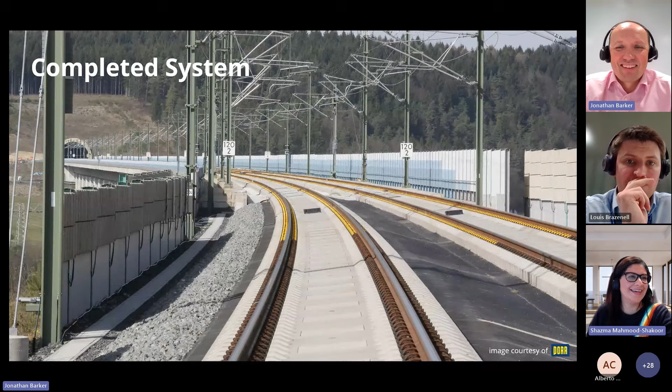Next slide, please. And that is just a view of what we hope it'll look like when it's finished. And that's it, thank you.

Thank you very much, Shazma. So there's a couple of questions on the chat which I'll read out now, but if someone wants to raise a hand, please do. First of all, thank you for the presentation. There's a couple of questions that haven't been answered. Rail expansion joints, are they a proven design product?

I think you're mute, Shazma. Sorry, it's a good question, I'll have to take that one away and come back to you.

The other question is how the 216-meter rail will be delivered to site without an existing operational railway. The slide I was talking about with respect to the rail connections and rail heads — we're going to be using Network Rail infrastructure to help us deliver our materials by rail, get them into our rail heads, and then build from there.

Okay, thank you. There's an interesting question for Jonathan regarding the thoroughfares — probably using AI, it's talking about the common station plan and how you manage the spread for disproportionate collapse of the glazing of the roof.